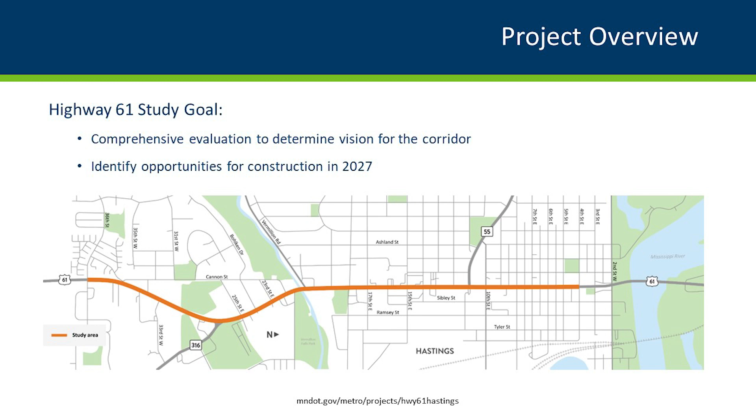Public meetings where we asked your input. The first one presented existing conditions, and we got information from the community on what worked, what didn't work, issues along Highway 61. Our second meeting presented concepts, various ways to move traffic, make improvements along the corridor.

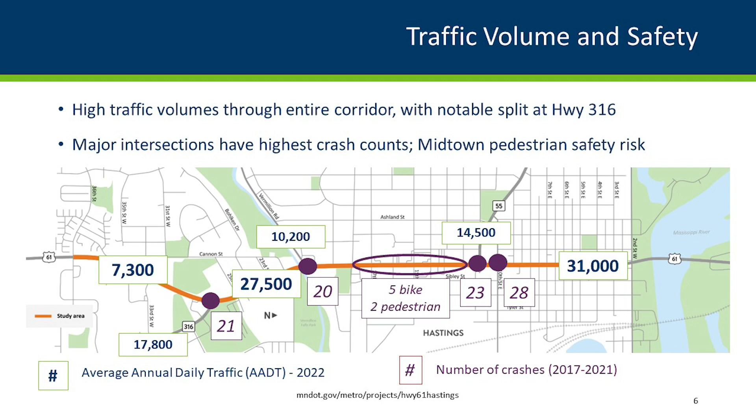There are a lot of accesses or driveways along with those public intersections, and that becomes an issue not only for pedestrians trying to move north and south or cross the road, but also for vehicle conflicts. More movements on the highway mean more conflicts and more risk for crashes, which plays out in the safety and crash experience we've seen over the last 5 years.

Other themes from what we heard: traffic operations, including the signals, how they are operating, and the timing as you move up and down the corridor, how many times you hit those red lights. The Highway 316 intersection is of interest as to what we do now that we've improved Highway 316.

What is the plan for that intersection to deal with the congestion there? There was discussion and a desire for sidewalks or trails at the southern end of the corridor. How do people at the south end of Hastings move along Highway 61? And then just an overall desire for improving the aesthetics, making sure Highway 61 reflects Hastings and that you know you are in Hastings.

We refer to our corridor study recommendations as the funding alternative. I'll be presenting the recommended solution according to 4 distinct districts that help us break the corridor into more manageable pieces. The first is the downtown district, running from our northern project limit at 4th Street to approximately 9th Street. We also considered opportunities for improvement further north, especially considering traffic coming into this project area from the Highway 61 River Bridge immediately adjacent to our study.

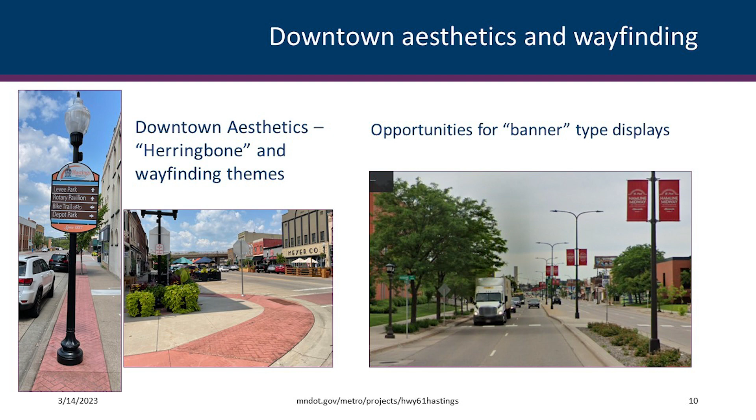One key element of recommendations in the downtown district is to incorporate design features of the downtown into Highway 61. We see an opportunity to bring that colored herringbone pavement pattern and signing themes into Highway 61. We also foresee opportunities for community identifiers, similar to this example of banners in the highway corridor, as shown on the right side of this slide.

Perhaps the signature improvement for this downtown district is the creation of a median barrier that restricts turning movements to right in and right out only at 5th Street and 7th Street.

The addition of a median should provide a traffic calming benefit for Highway 61, with slower speed encouraged by a more narrow-feeling roadway. This will also provide a safer environment for bikes and pedestrians, as the median offers a refuge for crossing Highway 61 in a 2-stage manner, allowing a pause after crossing 2 lanes and before crossing the next 2 lanes.

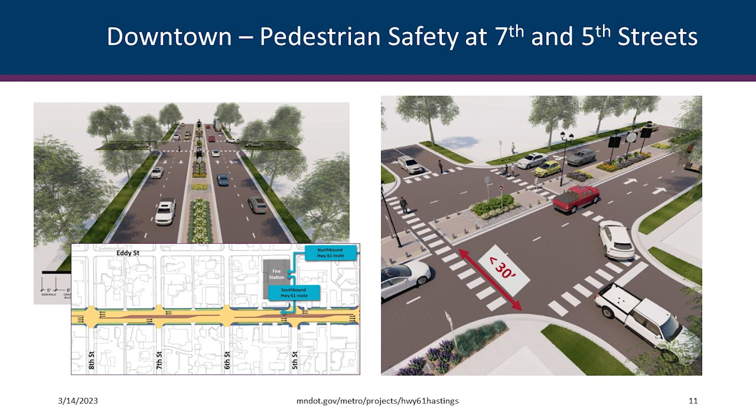We did consult with the fire station regarding their operations on Highway 61 and have confirmed that our proposed improvements are consistent with how they already use Highway 61.

When fire trucks need to proceed north on the highway, the station uses Eddy Street to the west and accesses Highway 61 by way of the traffic signal on 4th Street. One possible improvement would be to incorporate a warning light near the fire station to advise motorists of the presence of emergency vehicles as they attempt to enter the highway.

The City of Hastings is aware of the concern for lost parking. Ongoing efforts are in place to identify new off-street parking options.

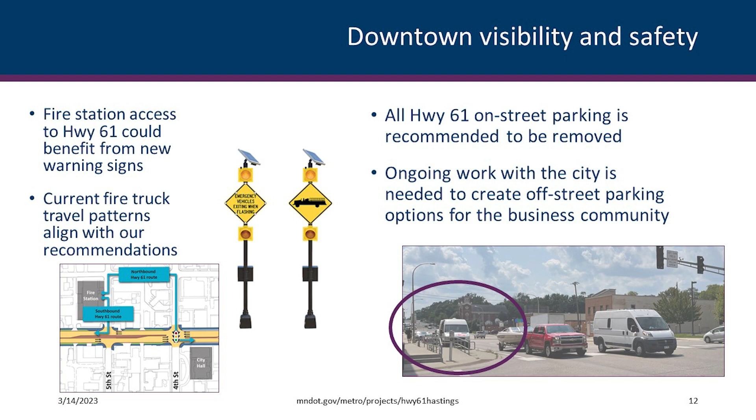The Midtown District is next, running from approximately 9th Street on the north to 16th Street on the south. The most notable location for this district is the intersection of Highway 55, along with the immediately adjacent 10th Street location just to the north. As noted in our crash data, these 2 signalized intersections had the highest number of crashes in our reporting period.

Some key improvements we want to make in this area relate to turning movements. Of particular importance is the improvement of the southbound right turn lane from Highway 61 to Highway 55. That area is constrained by the Todd Field wall, and as a result, the existing turn lane and pedestrian sidewalk are both below standard for design.

We propose to construct a new and longer right turn lane. As part of simplifying turning movements in this area, we also propose eliminating the left turn lanes on Highway 61 and closing those movements. Motorists will not be able to turn left from Highway 61 to 10th Street or into the parking lot entrance that currently is part of the Highway 55 intersection.

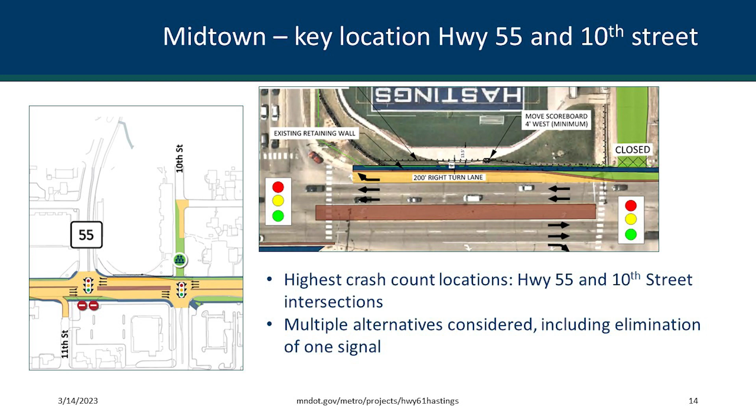Multiple design alternatives were considered at this location. This design, which retains the two traffic signals, had the best results for moving traffic and providing pedestrian crossings. In order to achieve the objectives I just described for the Highway 55 and 10th Street area, we do recommend reconstruction of the wall at Todd Field.

Analysis of the wall confirmed substantial repairs are warranted. We have talked with the school district and Heritage Preservation Commission about this valued resource. Minimal impacts to the field space are expected, and we believe historic elements of the wall can be retained as part of a reconstruction project.

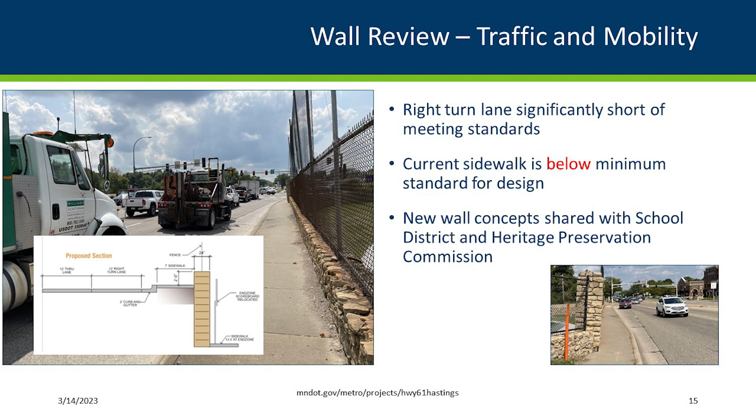Such an improvement would not only benefit motorists, it would also create a much more comfortable environment for pedestrians. Continuing through the corridor in this area around 12th Street, we see the opportunity to address safety concerns for pedestrians. The staggered crosswalk shown on the left is an example of a feature we envision being installed somewhere between 12th and 14th Streets.

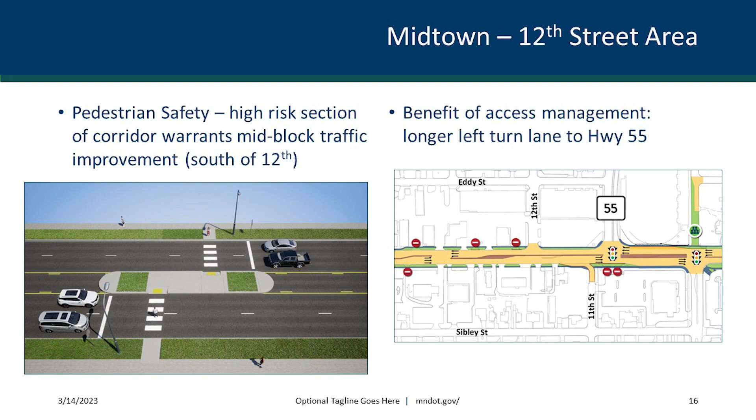Additionally, the reduction of access at 12th Street helps us create a longer left turn lane for vehicles turning from Highway 61 to Highway 55. The current short turn lane requires cars to wait for a left turn in the through lanes, causing congestion in the corridor. Access management is an important theme for all four of the districts in our study corridor.

An example is at 14th Street, where we see an opportunity to remove left turns onto Highway 61 from 14th Street. This is referred to as a three-quarter access, where safety is improved by requiring the use of the traffic signal at 15th Street for drivers looking to make a left turn onto the highway.

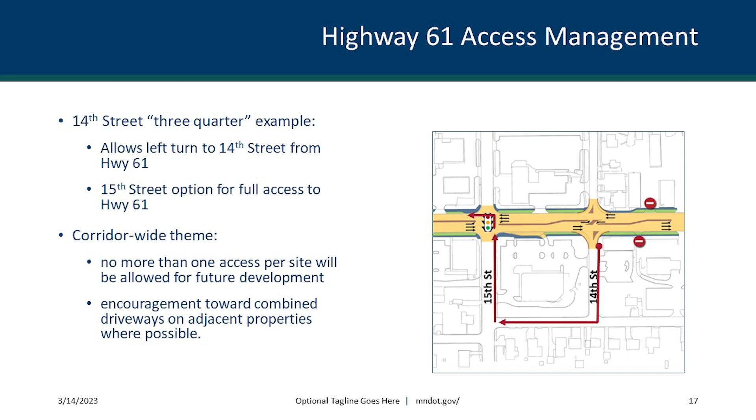For the corridor as a whole, we are making recommendations to limit Highway 61 access to no more than one per property. Where feasible, we encourage the use of combined access for adjacent properties, using one driveway entrance to serve both parcels. The Vermillion District runs from approximately 17th Street to 25th Street, with the County Road 47 intersection being a notable location in the district.

This intersection is also immediately adjacent to the Highway 61 crossing of the Vermillion River. As part of our study, we examined the age of that highway bridge and determined that it is in good condition. Any recommendations we make for this area need to avoid impacts to that structure.

At the 18th Street intersection, we proposed realignment of the side street legs so that they align directly across from each other. Currently, the misalignment creates a very large intersection that can be uncomfortable to navigate. By adding a traffic signal here, we also see an opportunity to create a safer pedestrian crossing.

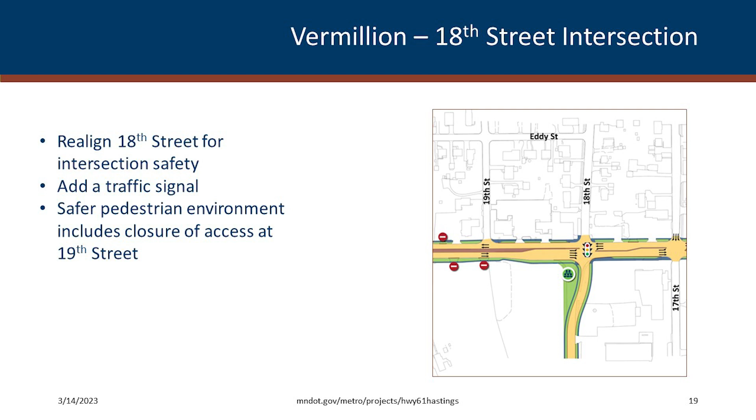With the addition of a median at 19th Street, the signalized 18th Street location offers a safer entrance onto Highway 61. Driveway closures proposed at the property east of Highway 61 also remove conflict points for bicyclists and pedestrians going to or from the Vermillion River area to the south.

Continuing toward the Vermillion River, one of the features we envision adding is a new pedestrian bridge over the river. Slight changes to the County Road 47 intersection are also proposed. We envision creating a new right turn lane for southbound vehicles turning onto County Road 47. Currently, a curb bump out prevents that movement.

We also propose a slight shift in the intersection itself. This shift will allow for a longer right turn lane to Highway 61 and also provide space for two left turn lanes moving from County Road 47 to northbound Highway 61.

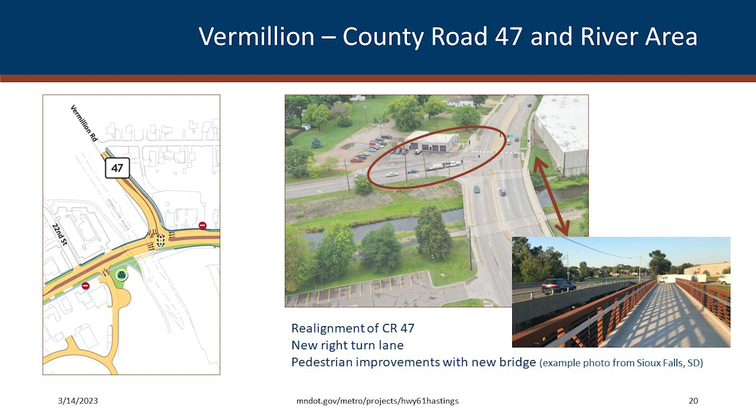More study of that possibility will be needed to determine timing of such an improvement in the corridor.

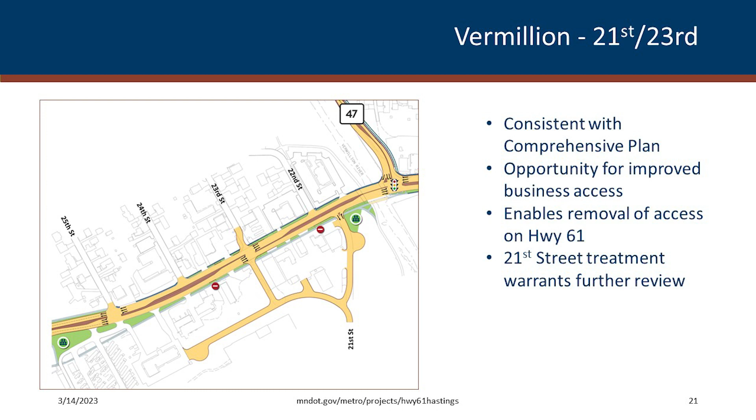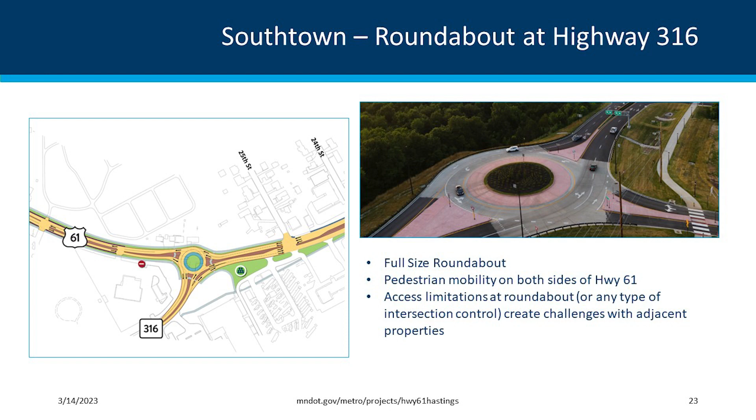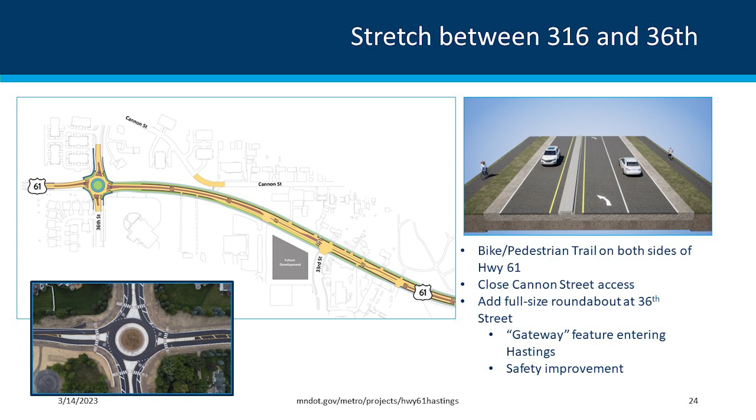One exception to that is our proposed closure of the Cannon Street access. Motorists will need to access Cannon Street by way of 36th Street, where we now propose a full-size, single-lane roundabout. An example of one is shown in the lower left of this slide. This roundabout design helps address pedestrian safety concerns and also serves as a gateway feature coming into Hastings that signals to drivers they are entering a new environment and slower speeds are appropriate.

Many of the improvements we've identified for the corridor will also create opportunities for enhancement of the image of Hastings. Locations such as the realigned 18th Street intersection will now have space that could potentially accommodate visual elements or pieces of art that start to create a theme through the whole corridor. As motorists experience the corridor, they will encounter common themes or imagery that provides a consistent message. This imagery helps to build a community identity.

Thank you, Tim. And now I'll wrap up with these last few slides here. First one talking about funding of the project.

So if we were to move forward with everything in that 2027 construction project, we're estimating the alternative Tim just showed would be in the $15 to $17 million range. The city would like to replace utilities at the same time, which is obviously the best time to do that. That would add another $3 to $5 million to it. So total project cost, again, if we were to incorporate everything shown, would be around $20 million.